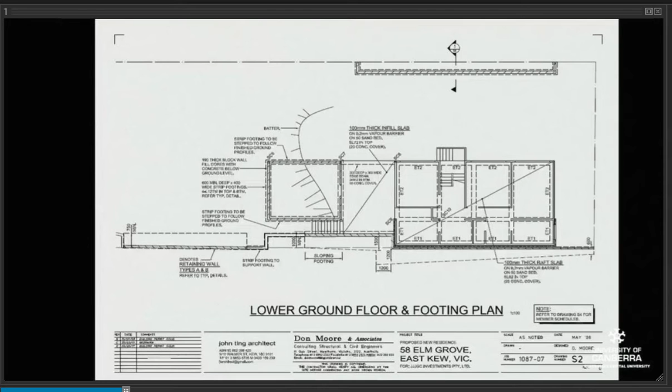So what we will now do is to go through a few different documents that have also been loaded up to the Moodle, and you can see those 4 over there, and then we will have a few more slides to talk about the other ones. So the first set of drawings that we will look at are drawings by structural engineers. I've actually put this on the Moodle as well. But what you can see here is that you're getting a very specific form of information that is only about the structure. Now, of course, it is coordinated towards the architectural drawings, and architects need to check that.

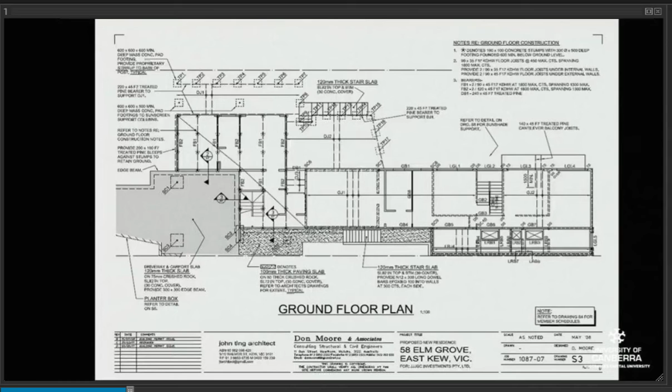But specifically, it gives things like sizes of bearers and floor joists, sizes of lintels, the form of masonry walls, concrete, and so on and so forth. Essentially, this kind of information is included in the architectural drawings, but only as indications. The actual sizes, the actual types of wood, the actual strength of steel, the actual strength of concrete, and sizes of steel all fall into the realm of the engineer, and they are the ones who would actually be specifying all this. So you can see here the member schedule.

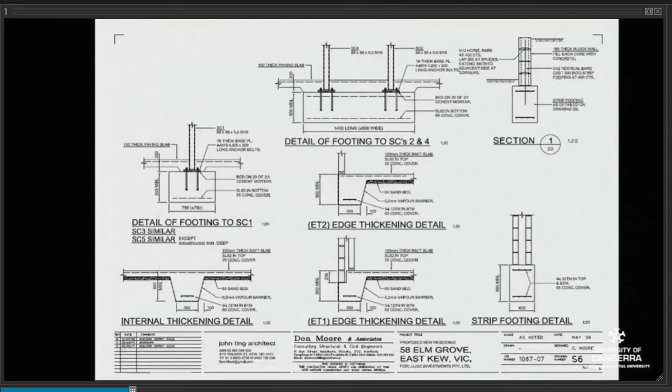So every single piece of structure is specified by the engineer, because the engineer has to then certify that all of this stuff conforms to the Australian standards for these sorts of things, and also to certify that the thing won't fall down. This goes right down to the detail level, as you can see here, where not only do they specify what is used, but they also demonstrate how it is fixed and how it actually goes together.

So the next set of drawings that I'll show you is from a licensed surveyor. This is important because these become legal documents for the project. So what you can see here is that the surveyor determines what the shape of the land is, what the heights and contours and features of the land are, and then from there we can use that as a legal document, which is why they're licensed. A legal document to be a true representation of the topography and the size of the site.

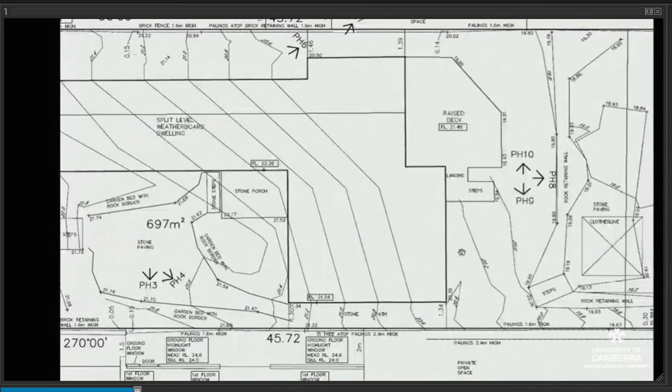And this is important when one is trying to deal with levels, because we need to provide all this kind of information to the authorities to make sure that they know what we're actually doing, and then can see that we are conforming to the regulations. Also with setbacks, this is very important, because it's very important to know exactly where the boundaries are.

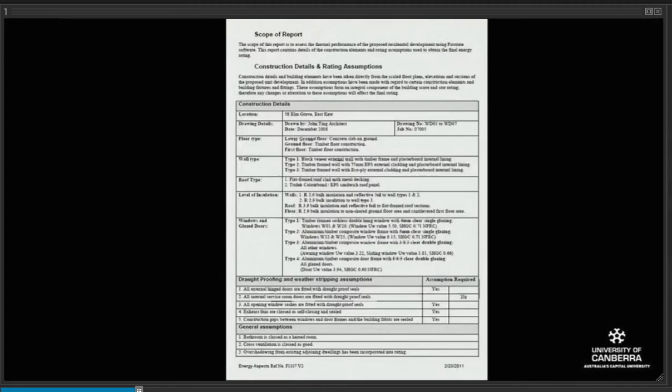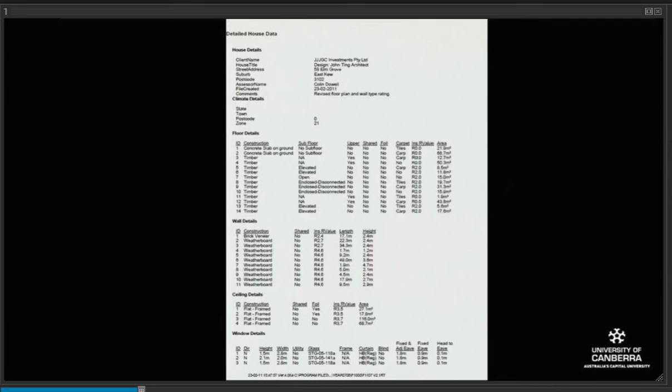The other registered type of consultant that we use is energy raters. They are the ones who go through our well-specified design, put it through a rating system, and then come up with a star rating for the house, which we will then be able to provide to the building certifier to show that we are conforming with the sustainability requirements of the building rules. So their methodology is all very clear, and their working method is all very clear. Every single element is put through the calculations. We then get a record of the calculation to see how many stars we have.

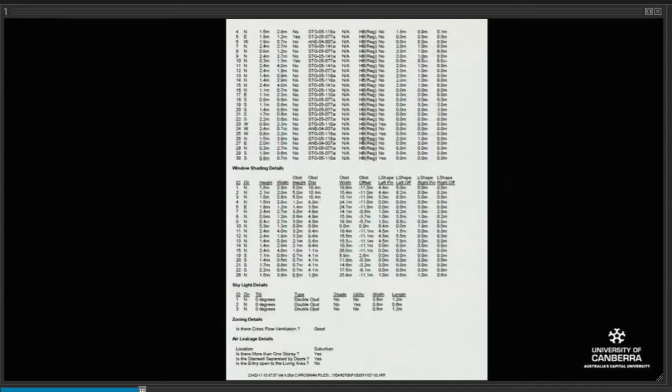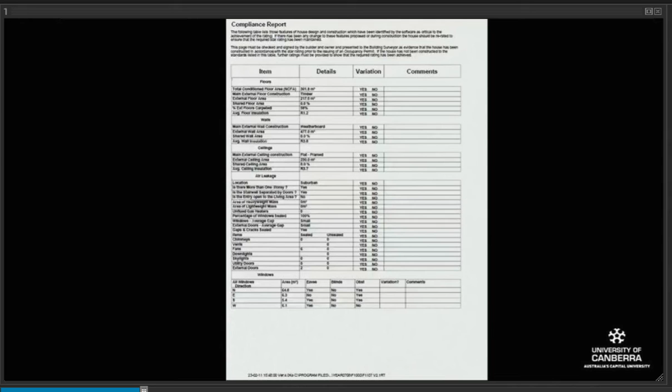Now, we generally need this kind of advice throughout the process, because we need to know how best to design the house in order to have the required outcome. So it's good to have energy raters involved during the design development phase, so that we can know what kind of windows we need, how much insulation we need. Sometimes building surveyors may also be able to help us with things like how to actually design the house.

But on the same note, they can also advise us as to the limitations of the software. So we do know that the FirstRate software used in Victoria is something that very much likes more square-like plans. If you have a square plan, it tends to have a better energy rating than a long rectangular plan.

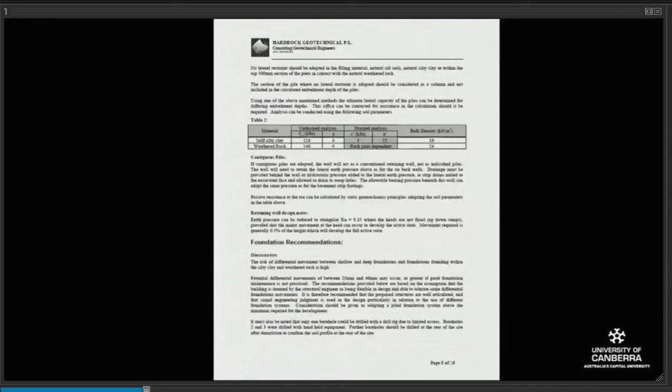So the next consultant that we'll look at is the geotechnical consultants. They are really engineers. They are registered like structural engineers, but they're called geotechnical engineers. What they do is they go and test the soil of our site in order to tell us what the strength is and how we should treat it in terms of structure. So their information is very important for the structural engineer.

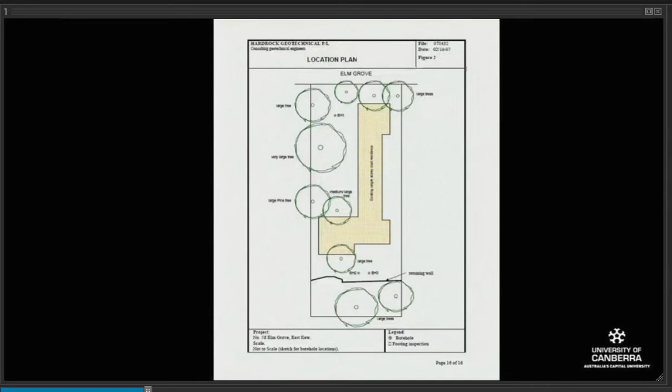As you can see from here, how they do that is they go and make a number of boreholes within the site, and then they pull out the soil, and by looking and by feeling the soil from a certain depth, they can tell what kind of soil it is, and they write us a report based on that.

So the next kind of people that we'll be looking at is actually some consultants that came from Tony Trobe's lecture from last year. He had a really interesting project because this was a coastal project with all sorts of different overlays for development approval. So he needed to get a whole stack of different kinds of consultants involved.

This included flora and fauna consultants, a mob called Ecological, who actually wrote a report based on what was required by the environmental overlays of the council. So what they had to do was basically to demonstrate that the design would not impact on the flora and fauna or the habitat of certain protected species, and would not be damaged by the proposal.

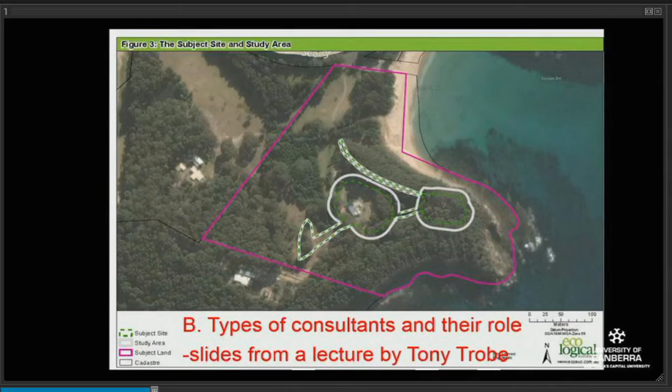So what we see here is really the areas where they wanted the house to go, and therefore the main sort of study area of their report. And in purple is actually the site of the land. It is actually a spit of land that sticks into the sea, and was very sensitive.

And what they did was, in particular, they were looking for the presence of the powerful owl on the subject areas, and they did that by looking for hollow-bearing trees where those owls like to nest, and also for owl pellets to look for evidence of powerful owls being in that area.

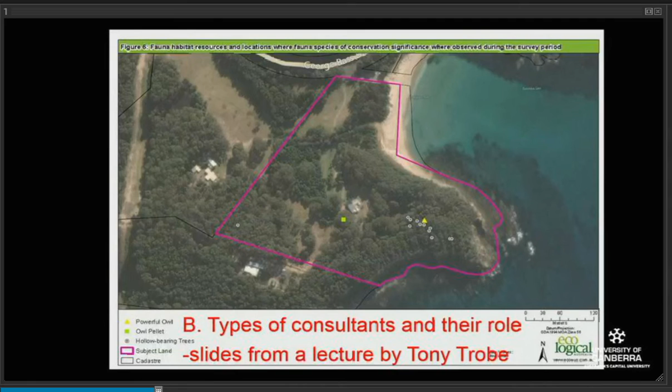So essentially, once they had that distribution, they needed to cross-check that against the proposal. This proposal was made up of two parts, and essentially what they showed was that the proposal of the two houses was not going to affect the one tree where those powerful owls were actually nesting.

The next kind of consultant they used was these hydraulic engineers, which basically designed an on-site sewage management system and then reported on how that was going to work in terms of the site. So what this means is that the site does not have main sewage, and they needed to design a system of septic tanks to deal with the sewage of the two houses.

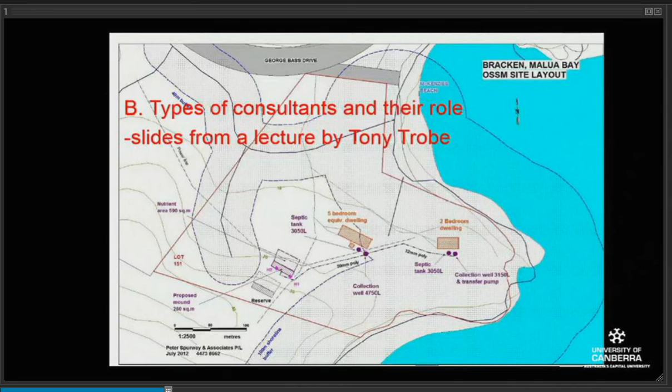And not only that, but they also needed to design overflow systems, because that's what happens to septic tanks, or sewage treatment plants: they have to get rid of their grey water once the sewage has been treated. So they needed to demonstrate that they could design and build a system whereby that water would be retained and would not make its way into the sea.

So they did that by a series of mounds, which would then contain this grey water overflow from the sewage treatment plants. They go right down to the technical detail of how to actually build the mounds from which that grey water would exit and be distributed and then absorbed into the soil.

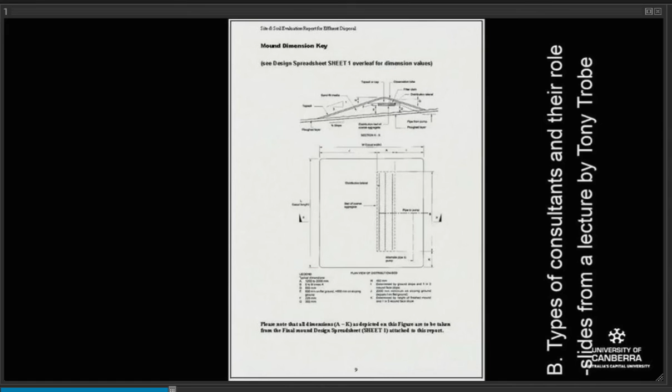So the third part of this lecture is really about how one engages consultants. And there are two things that are important here, I suppose. One is how lead consultants are engaged and how specialist consultants or secondary and sub-consultants are also engaged. So the main thing to think of here is the chain of command and communications, and we will talk a bit more about this when we get into the procurement aspects of construction, which is one of the lectures coming up, given by Robin Hardy.

Now, this is really a recap of how Acumen refers to things. Acumen refers to specialist consultants, which in the construction world are referred to as secondary consultants or sub-consultants. So what we need to get into here is what the process of selecting consultants is.

So essentially, as I said before, consultants can be selected by the client or the architect. And in all cases, really, if the client wants to choose consultants, this should be vetted by the architect, or the architect should check that the consultants the clients want on the project are actually qualified and able, and so on and so forth.